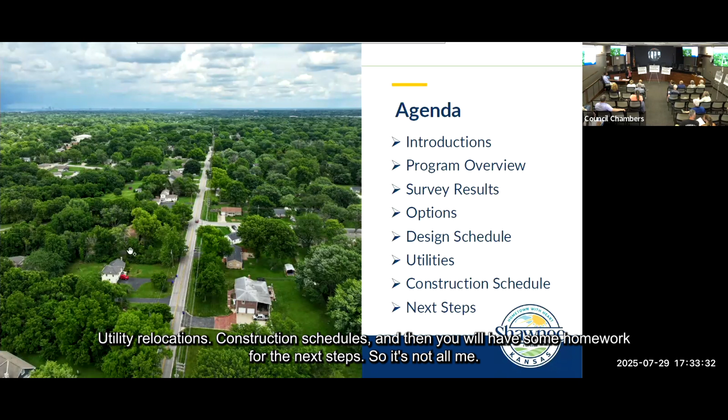But anyways, with me here today is Aaron Castro. We are both managing this project. I work for the City of Shawnee. I've been with the City of Shawnee for about a year, and I've been doing municipal projects for the last 10 years, 8 years, I don't know, I lost count. Aaron has been providing engineering consultant services for municipalities for about 15 years. Together we want to manage this project with you and for you.

Our goal is to lead a very successful community center transformative project along the corridor, along 51st Street from Quivira Road to Black Swan Drive. We want to give you priority because you are the ones that live, work, and drive that road.

So what is the project? Let me introduce it. This project is a street improvement project of a section of 51st Street from Quivira Road to Black Swan Drive. The idea of this project is to do street improvements, storm drainage improvements, and also increase the connectivity of this area that felt a little left behind. What you're seeing in this presentation right now, all those lines in blue, are areas that currently have some sort of sidewalk, trails, or bike lanes, but that section specifically continues to be very narrow, without any sidewalks and with ditches.

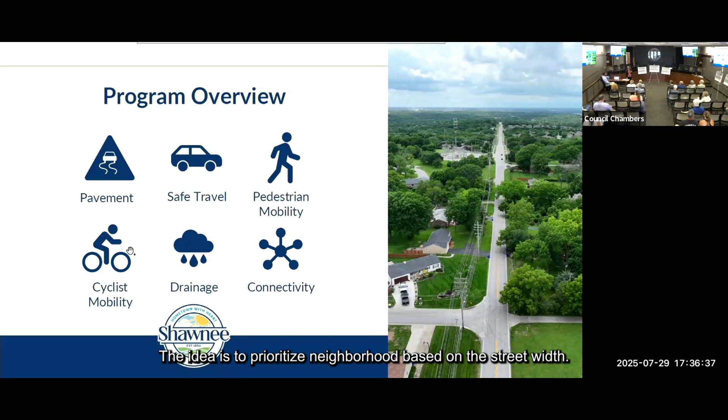The idea is to prioritize neighborhoods based on street width, traffic volume, residential units per lane mile, distance from school, distance from parks, connection to curb streets, and connection to sidewalk streets. As we continue to improve this, we continue to improve more and more of these neighborhoods so we have better connectivity.

All right, citizen input results. Thank you for everybody that completed the survey. For those that didn't, don't worry, you'll have a second opportunity, and you'll leave with some homework out of here today. But what the initial survey told us was a little surprising for me, but surprising in a good way.

It does seem like we do have some drainage issues, but they're not major. Based on the results, 23% of people reported drainage issues completely related to intense storm events, which is expected based on the areas and the ditches. They reported that the majority of the water was ponding along those ditches. Some people reported ponding water on their driveways and backyards. We will try to see what we can accommodate with this project to make sure that everybody's drainage issues are taken into consideration.

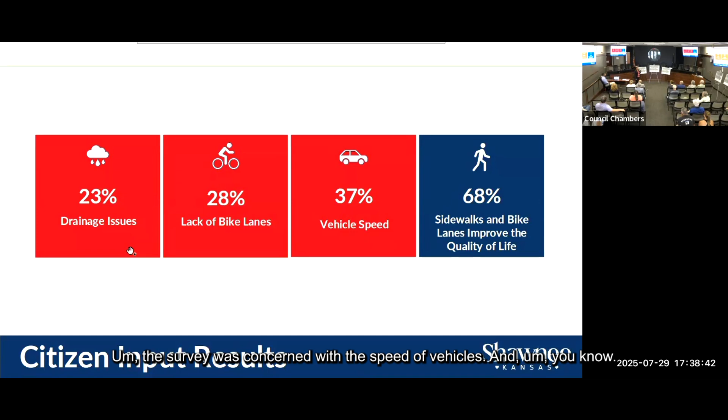Hindsight is 2020. I think that if I would have given you guys options to choose several, that number perhaps would have been higher based on the comments that I read from many of you. But what we concluded with this survey is that regardless of the concerns, 68% of the people that responded would be supportive of installation of sidewalks and/or bike lane, or a combination of both.

Basically, the input of this project, of this survey, told us: hey, we need this, we need these improvements, we need the connectivity. It's not necessarily very safe for kids that are going to school, waiting for the bus. And let's see what you have to tell us.

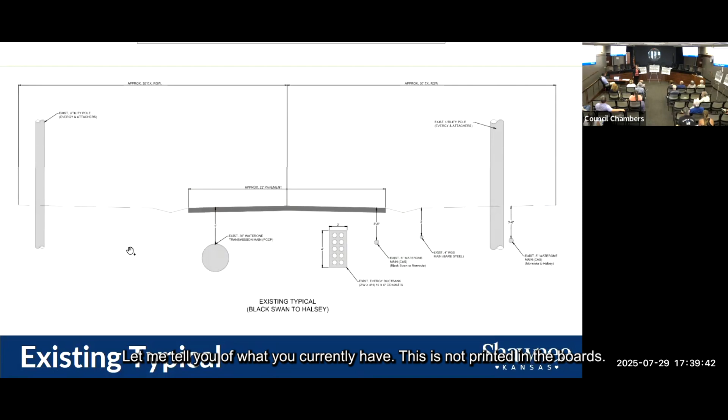So to tell a complete story, let me tell you what you currently have. This is not printed in the boards, but basically today's street section is about 22 feet from back of curb, pavement section. 22 feet, and that's basically it.

There are ditches, a lot of underground utilities. You can see that - let me see if I can work this pointer. Okay, no, I cannot. But that square thing with holes, that's an Evergy duct bank, Evergy's facility for power. Then there's a round pipe underground, that's WaterOne. And then we have some other stuff - more water, more gas, more communications in there. And the side things that you see going up, those are the poles that we can see. They're very evident, so that's what we can see above ground.

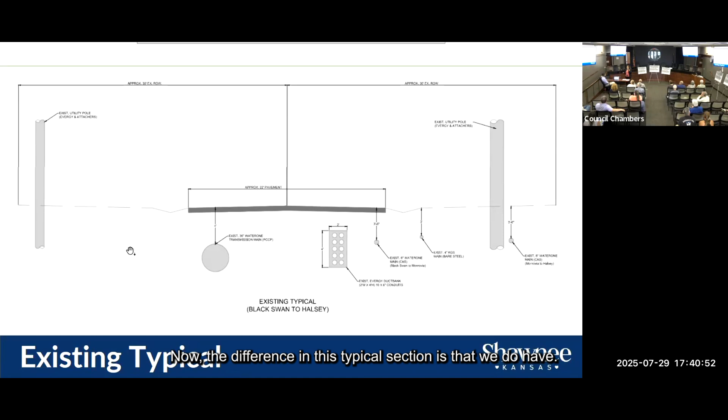This typical section is basically from Black Swan to Halsey. Now, the difference in this typical section is that we do have quite a wide right-of-way in there - it's a 60-foot right-of-way. But the right-of-way becomes a little bit narrower as we drive towards the east, towards Quivira. At that point, it's about 50 feet, so we lose about 10 feet of right-of-way and still have the same utilities, still have all the facilities. So just to tell this story, it's very crowded.

All right, so what are the options and what is the name of the game? Find the difference. We have developed multiple options for you, and I'm sure that even after this meeting, we could develop 100 more. They will all be feasible. Today's meeting, the intent of the meeting, is to show you 3 basic options that have sub-options.

Option 1 keeps the street width, or the pavement width from back of curb to back of curb, at 36 feet. We are saying that this is kind of like a minor residential collector with bike lanes. On this option, let's follow what we have at the west of Black Swan - it's wider streets, you have sidewalk on both sides, and bike lanes are allowed.

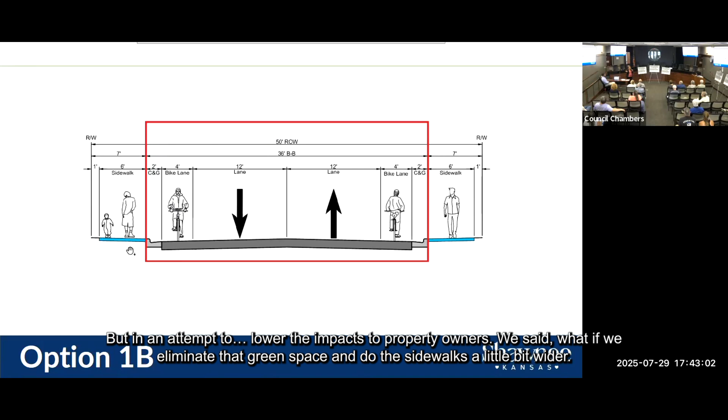Now, option 1B: the width of the street from back of curb remains the same, but in an attempt to lower the impacts to property owners, we said, what if we eliminate that green space and do the sidewalks a little bit wider, but directly back of curb? So this is like when you go to the eye doctor - option 1 or 2.

Again, same back of curb width. And here I kind of put them together for visualization. As you can see, the difference is that green parkway in between the sidewalk for this option. This option keeps the streets also wider. So just keep that in mind.

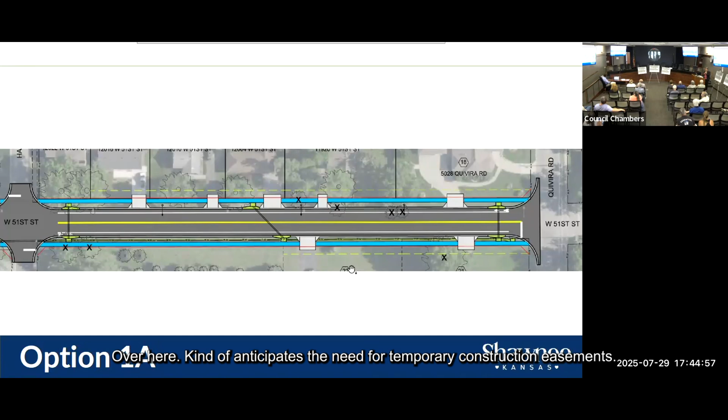So what I'm trying to show you here in this picture is this yellow line over here kind of anticipates the need for temporary construction easements. So it's only an anticipation that we want to show kind of how close would we get into those yards with this option. The red line, which is right here, kind of hugging the blue sidewalk, that would be the additional right of way that we would have to acquire in this particular portion of the project to do those improvements. The blue lines are associated with the sidewalk, and then the space in between, it's that green space.

This gives you a general feel of what the driveways look like in a project like this. You can see they have those kind of, I like to call them wings.

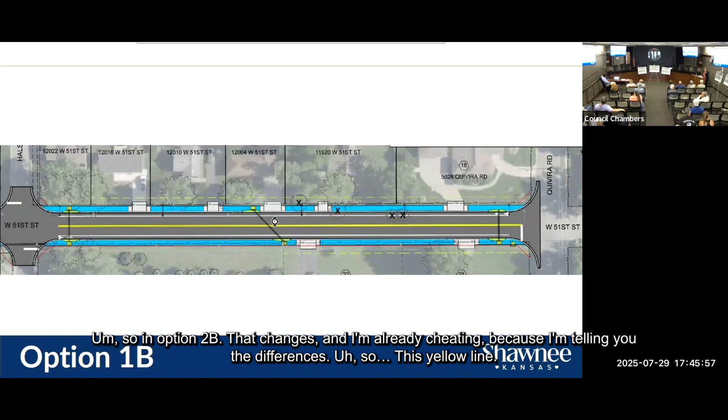So in option 1B, that changes. And I'm already cheating because I'm telling you the differences. This yellow line gets a little bit closer or farther from the property, okay? The sidewalk, it's right at the back of the curb. You can see the different feeling on how the driveways would kind of look like. So that's for that.

Oh, the white lanes over here, those are the bike lanes. So that's how continuing that section of 51st Street would look like for options 1A and 1B.

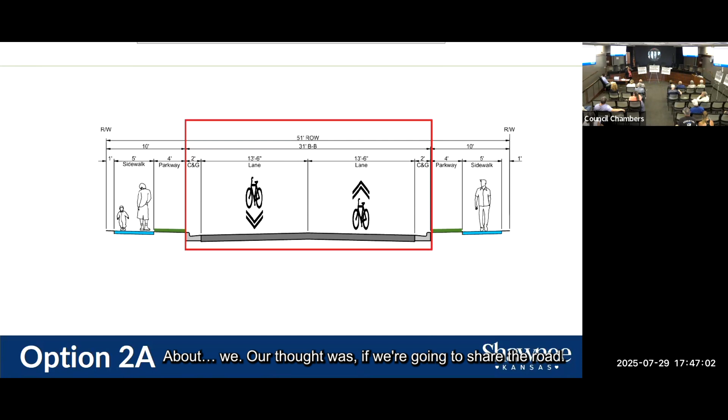Now, with option 2, we went a little bit crazy. We're like, okay, we're making progress with option 1, what else can we tweak? So in here, we changed it a little bit. We went 31 feet back of curb to back of curb, but we had 3 more options. We looked at this, our thought was, if we're going to share the road with bicycles, if we're not going to give them a dedicated lane, can we come with an option that maybe satisfies everybody? So this is kind of what we looked at in option 2.

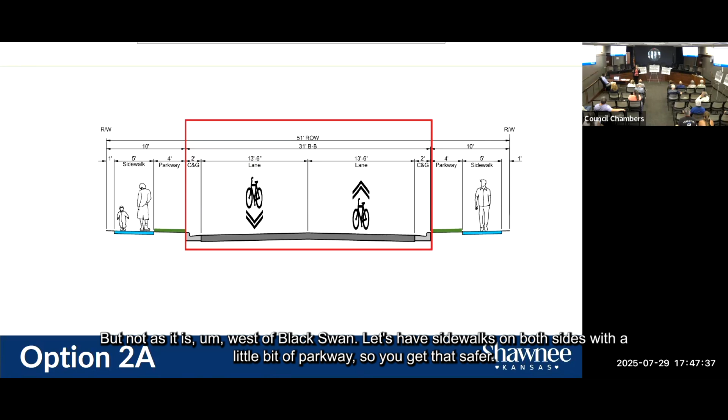So one of option 2, it's let's share the road. Let's make the road a little bit wider than it is today, but not as it is west of Black Swan. Let's have sidewalks on both sides with a little bit of parkway so you get that safer buffer from the cars. Or let's go ahead,

maybe, and on the north side, do a shared use path that can be used for people that walk, for bikers, however we want to use it. Or let's make the parkway smaller with sidewalks on both sides.

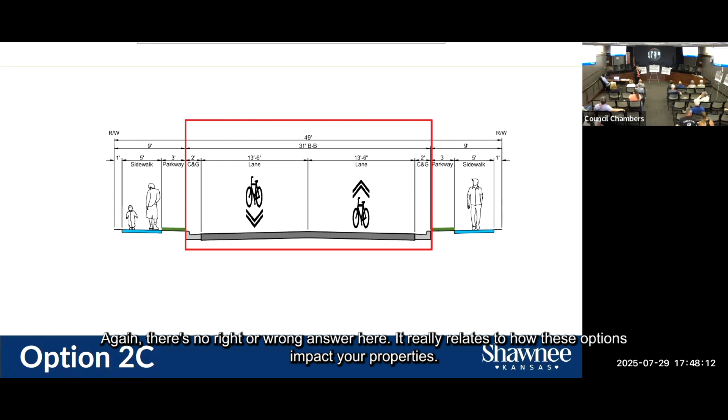Again, there's no right or wrong answer here. It really relates to how these options impact your properties and the feel of your neighborhood. How do you want to see your neighborhood change?

I kind of went through the same over here to show you the differences. And I also drove myself to places like this. I took the Nieman path over there and biked it with my son. I went to Merriam, and I wish I could give you an answer, but I like them all. They're different, they fit those neighborhoods. So I encourage everybody to try to look for something similar and try it out so you can have the same feelings for options like this.

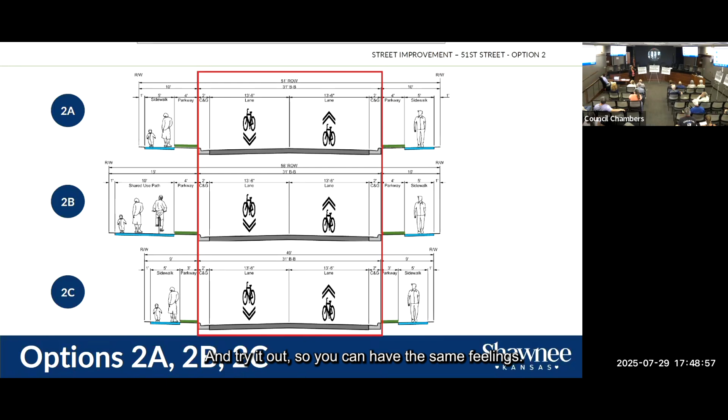So I'm going to come over here. Sorry, I'm going back and forth, but I kind of want to show on this option. So this yellow line right here, it's about the limits of construction or of the temporary easement for option 2A.

You can see we estimated the tree removal as a complete estimate. Please don't take it to heart. Anything that we're talking about in today's meeting are very estimate amounts.

But for example, we anticipated that in option 2B, you can see how much closer it would get, and it would give us the need to remove an additional tree from this property. And then option 2C, it's a little bit narrower. So again, option 2B, 2A, which one do you prefer?

One or two? One or two?

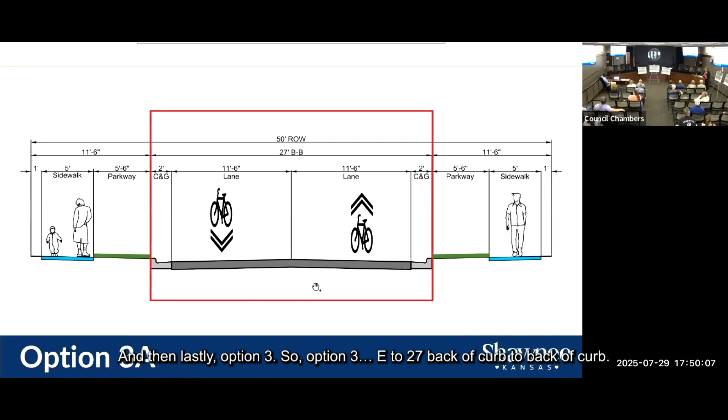And then lastly, option 3. It's 27 feet back of curb to back of curb. It is most similar to what you have today as far as width, but it would still have curbs, still get rid of the ditches, and it will have sidewalks. So the driving feeling will be similar, but the neighborhood feeling would be a little bit different. Again, this is share the road with cyclists, with some parkway over here.

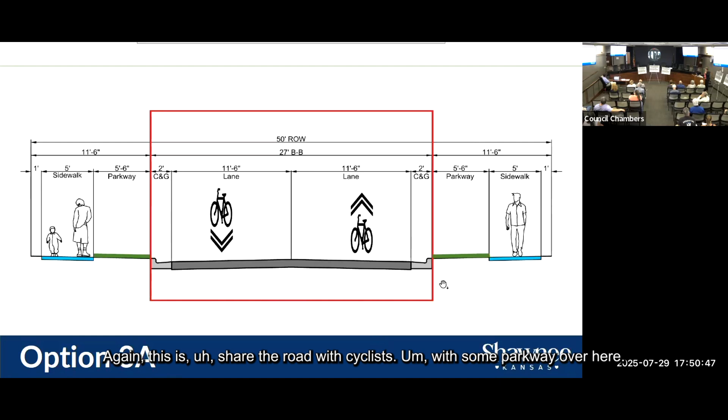And then in option 3B, we get rid of that parkway, so we put the sidewalks to the back of curb. Some benefits that I can see on the parkway, I'm not against or in favor of any of them. In talking to people in both neighborhoods, just based on my own research, some people like the fact that they only had to mow up to here, that they didn't have something in the middle to mow. So I thought that was interesting, and I shared that with you guys.

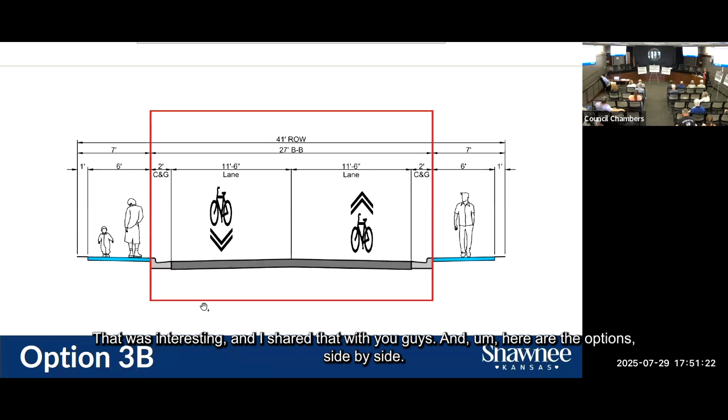And here are the options side by side, options 3A and 3B. And this is how it would look on that corner of Quivira and 51st. So in 3A, we still get into several of the trees, and in this one we do as well, but we're closer.

Now, Ibaidi, why are you so concerned about getting closer? Who cares? Let's have the green space. Several factors.

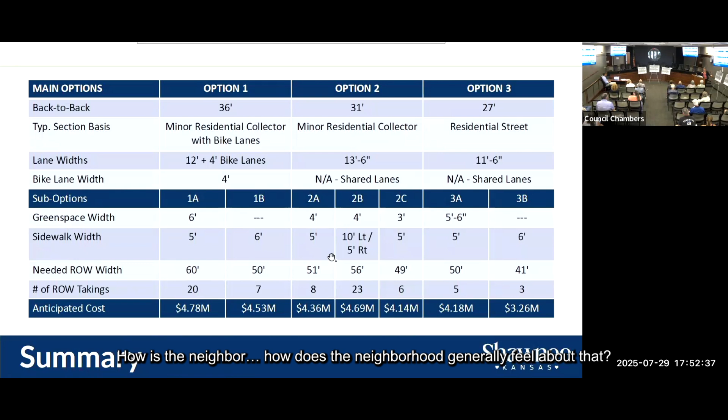One of them being utilities. Utility relocations are going to play a big number on this, so it's going to impact the cost and it's going to impact the timeline for the project. That's reason one. Reason two is how this can impact properties - the wider we are, the more right-of-way takings we need. How does the neighborhood generally feel about that? We want to know that from you, so make sure you tell us.

But in summary, I put this table together - well, Aaron put this table together - where we walk you through the different options we just talked about. So option one basically says we're going to have 36 feet back to back. That's how wide the street is going to be and feel, and we are going to have dedicated bike lanes and sidewalk with this option.

Now, for option one, we have sub-options 1A and 1B, and they basically come down to do we want green space in between the sidewalk and the street or no. You can see the estimated prices for both of the options, above 4.5 million. The price includes design, right-of-way takings, acquisitions, utility relocations, obviously material cost - all of that is taken into consideration, as well as a contingency for this project, just based on the uncertainty of being a concept design.

Option two is the middle spot where we're not going as big, not going as wide, but we're going wider, and with that we have no dedicated bike lanes, but we share the road with cyclists. Within those options, we have three sub-options. One, it's just a sidewalk with a green space. Option B would be let's have a trail or a shared path. And then option C is let's do the sidewalks, but maybe with a reduced green space.

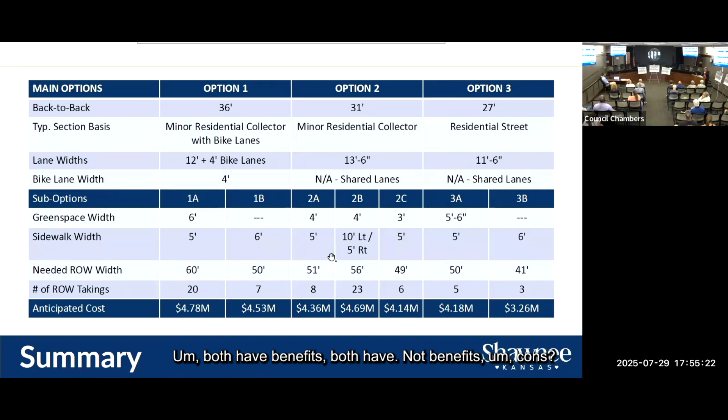And then option three follows the nature of what you have there today, a little bit wider, not that much wider, with sidewalks, with green space or no green space. So the cost definitely goes down as we move down these options. The feeling of the neighborhood goes from having wider streets to more narrow streets. Both have benefits, both have cons, and they are outlined and summarized in these boards.

But I will also make my own summary here. The narrower we get, the less takings we need and the less utility relocations we have to do. The faster the project moves forward, the less expensive it is. The other options are also possible, but they require more takings, they would likely be more time consuming, and more impactful for all of you.

So what is the design schedule, Ibaidi? You've talked a lot, very fast - what do you need from us?

Well, I have put together a second survey. You can ask us questions when you're here. For those at home, I will make sure to leave this presentation on for a while and switch the options every minute or so, so you have some time to digest them, and they will be published tomorrow on our website. But for those here, you can mingle, take a look at the boards, and follow up with the survey.

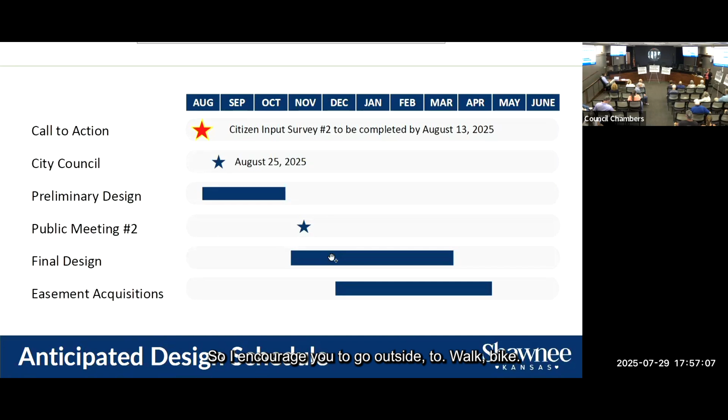So on your way out, you can take a little QR code that will take you to a survey, or you can fill it out by hand, whatever you prefer. You don't have to do it today. You have until August 13th. So I encourage you to go outside, to walk, bike, see how you would feel in these instances, and then let me know what your preferred options are by August 13th. After we gather all that input, we're going to share this information with our city council and get some direction.

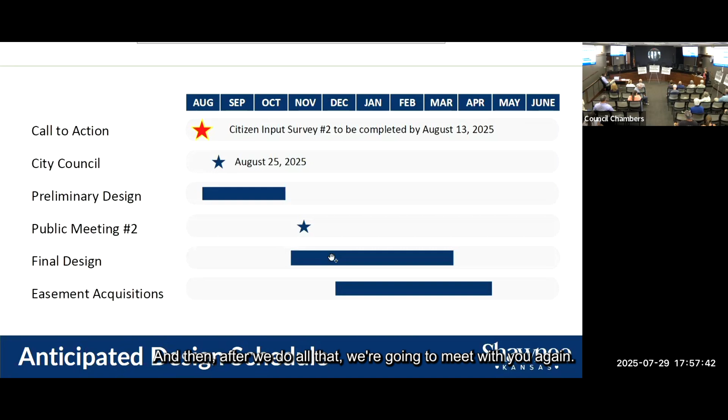From them on how to move the project forward. At that point, we will begin our preliminary design with survey information, so that's going to help move the desired option forward. And then after we do all that, we're going to meet with you again. The whole idea is you can be as involved or as hands-off in this project as you want. I think the more involved we are at the beginning of the project, the better product we give to our residents. Then final design, we anticipate to finish by the end of March, maybe beginning of April. And then in conjunction to that, we will begin the process of easement acquisition. Again, we will walk you through all that—that's your permission to let us be on the property to do the work.

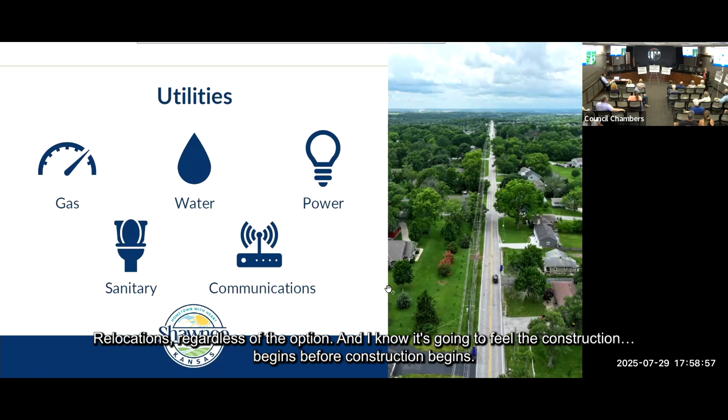Now, I touched on this before, but I want to stress the importance of utilities. Each option is going to have utility challenges, and the project does require a lot of utility relocations, regardless of the option. I know it's going to feel like construction begins before construction begins, and it's a process. We will walk you through that as much as we can. All utilities will have to relocate: gas, water, power, sanitary, AT&T, Spectrum, you name it, all of them, Google.

So then we will meet again. Wow, and then again. So we'll meet a third time and a fourth time. And then maybe we can meet again to celebrate too. I don't know, I think I need to get council approval for that. But...

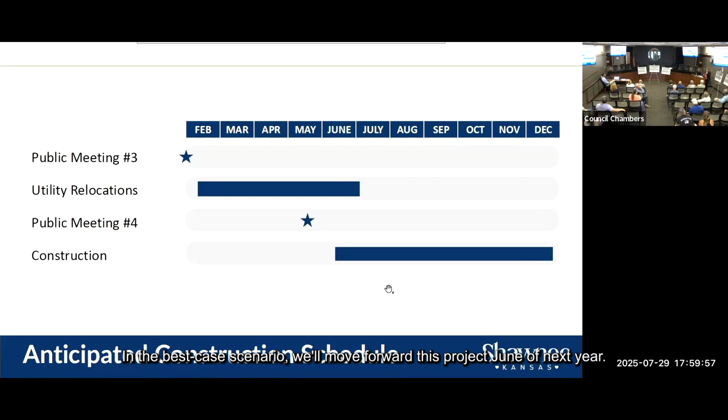There's a period of utility relocations, and I have shown that on this anticipated schedule. And construction—this is again very estimated, it would all depend. In the best case scenario, we'll move forward with this project in June of next year and finish it in December of 2026.

So what are the next steps? Here's a survey, I'm going to click on that. All right, so it's a 3-question survey, and I'll show you what it looks like.

We want your name and address. The reason why we want your address is we want to give priority to the people that actually live on that corridor and would be directly impacted. Everybody's input will be taken into account, but those that actually live in the corridor will be given a higher weight when we present this to the council member. It has a picture of these options, and then you'll get to move your preferred option—the ones at the top are the ones that you prefer, and then you submit. That's all you need to do for that.

And then let me see, I kind of lost my presentation. I'm sorry.

There we go. If you're looking for more information, there are two places that you can go. You can go to our construction website and then just type 51st Street right there, click on it. There's another website over there—you can just copy and paste that link.

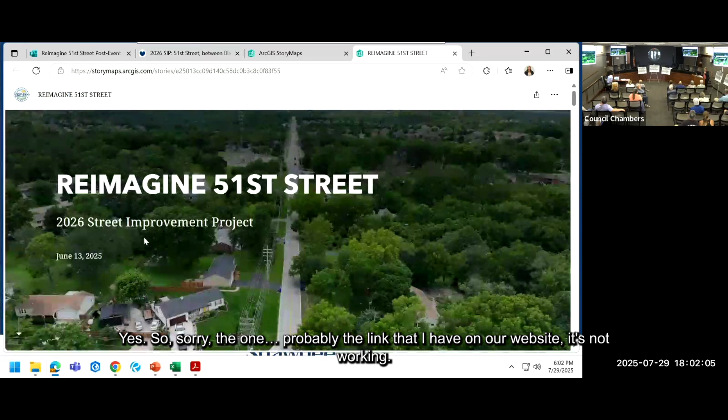In there, you can also find more information about the project. Let me see if I click directly on it, if it takes me—yes. So sorry, the one link that I have on our website, it's not working. But on this page, you have information about the project, schedule, and input. The public meetings are recorded and will be put in there, the YouTube link will be put in there, so if you ever miss one of the 3 remaining public meetings, you will have access to them. The surveys will be here, and all the PDF files of the presentations will be here.

So my information is there everywhere. Call me if you have any questions, if you need help accessing any of this information, please make sure to contact myself or Aaron. We'll be glad to walk you through any of the questions you have. If we don't have the answers, we'll get back to you.

So now it is your time, it's your turn. Can I answer any questions for those that are here first? Yes.

That's a great question. For those at home, the question was which option will put the utilities underground? Unfortunately, none of them. Those are considered private improvements and they're outside of the scope of this project.

Is the drainage for each option different, or would the drainage plan be the same between all the projects? As of now, it's the same throughout. We would need to acquire additional information to fine tune the drainage.

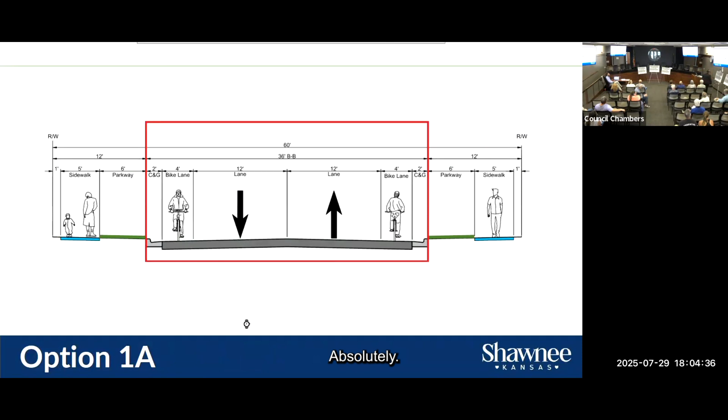The question was if I can put 1A up in the area. So here we are.

This is just a question with no opinion. Have you considered putting where one sidewalk is narrower and the other sidewalk is broader? Would you consider putting the broader sidewalk on the other side of the street? So the question was, would we consider putting the broader trail on the south side versus the north side? We wouldn't be opposed to it, but as of right now, the north side is more favorable, because the utilities of Evergy along the northern portion are less convoluted.

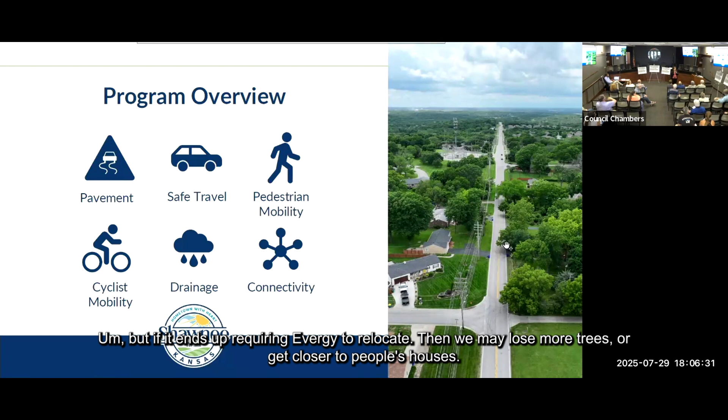Are the power lines going to be moved? Are the power poles going to be moved? Each option differs on the number of poles that would need to be removed. The narrower the street is, and the closer the sidewalk is to that street, the fewer poles we will need to relocate. The wider it is, the more extensive the relocations would be.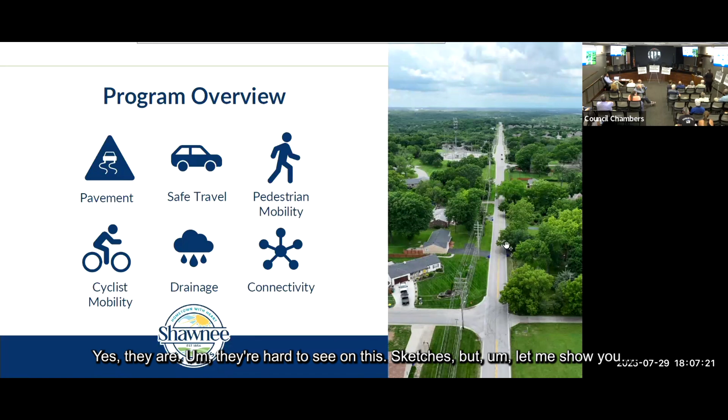Is there any lighting provided in any way? Great question, thank you. The question was, is there any lighting upgrades provided with this? Yes, there are. They're hard to see on these sketches, but let me show you. It would be kind of like this, right here, one is shown. Lighting is part of these upgrades.

Back to the statement about the wider trail being on the south side, the park's on the south side, so that might make more sense. So the comment was regarding the trail being on the south side - it would make more sense since the park is on the south side.

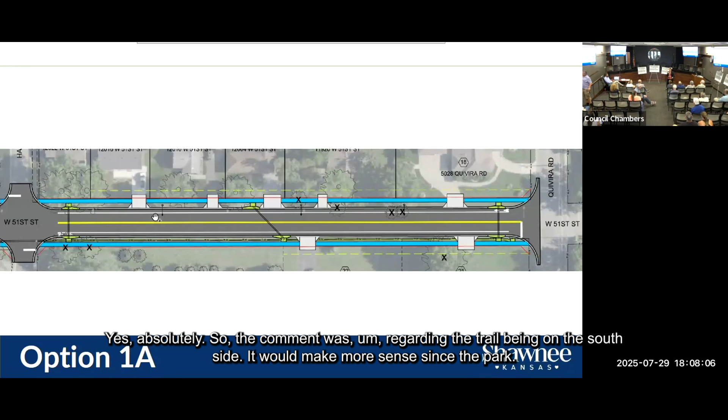There's another, yes. I think I have that. So yes, it appears that we have parks and school. Here we go, so we have the elementary school here and the park here.

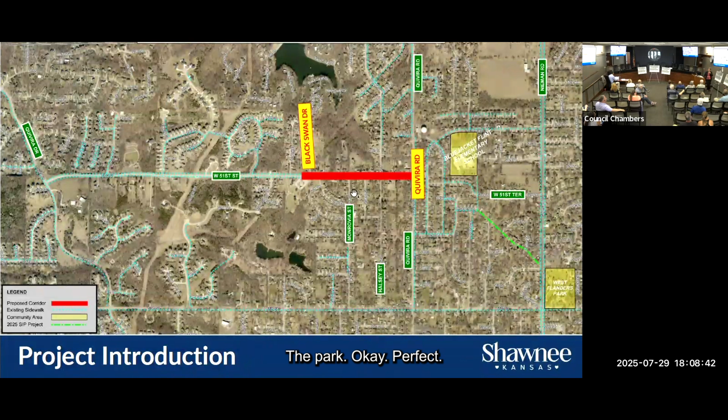Agreed, yes. Question - if we went with, I actually have two questions. If we went with just a wider sidewalk on one side and maybe a bike lane, as an option two as well, instead of having to have sidewalks on both sides, could we just go with a wider bike slash sidewalk on one side and a bike lane on the other?

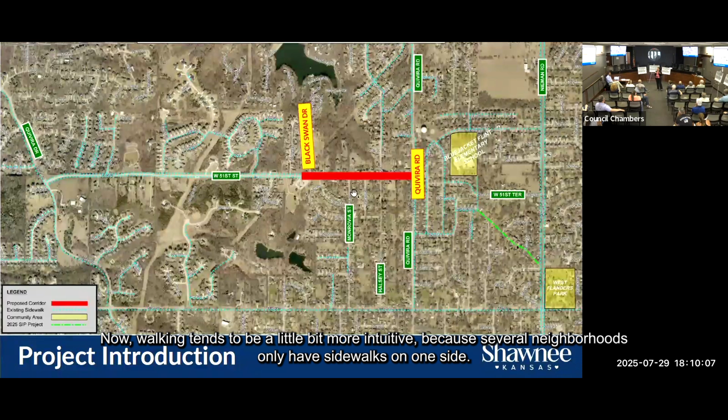So the question was, would we be able to combine some of these options with perhaps the sidewalk being on one side and bike lane on the other, instead of having sidewalk on both sides? I think we looked into it and we could look into it further. The challenge becomes where you have the crossings for the people biking and even those walking. Walking tends to be a little more intuitive since several neighborhoods only have sidewalks on one side. It's with the bike lanes that it becomes more challenging. We even looked into having two-way bike lanes, but it just didn't feel that this neighborhood was the right approach for that.

You would still need to go wider. When we looked at it, it didn't feel that it would fit this neighborhood in particular. Now, would we be willing to look at sidewalks on only one side? I think that could potentially be an option depending on utilities. We're too early to see that, but we will keep you informed. Did that answer your first question?

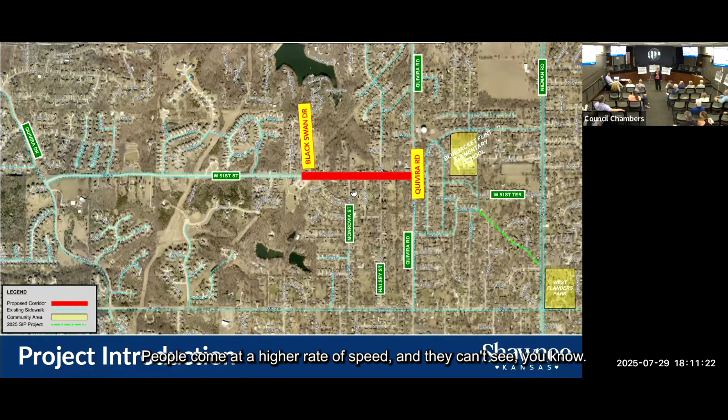You had two questions. Okay, what's the second? My second question is, I live off of Monrovia and 51st, and just to the west of me is the big dip before it goes back up near Black Swan. In that area, people come at a high rate of speed and they can't see you pull out. So is there going to be an elevation change with the drainage going in there to help reduce that?

You're talking about right there at the west end, at the tie-in? Yeah, just a little bit west. Whether or not to shave off the hill and provide improved sight distance. Right. And I will give you this because they can't hear us: the question is, will we do vertical changes to improve visibility at certain intersections? I can't give a definitive answer on this because we'll have to go back and discuss a potential option there with the city.

But right there is Evergy's facility, right on the corner, at the top of the hill. So currently the project and the profile are tying in right there at Black Swan, which is basically at the crest of the hill. Then as you go down, we'll be using a 30-mile-an-hour design speed for everything from Black Swan to Quivira Road, which will to some degree smooth out at least the sag that comes just to the east of Black Swan. And then when you come back up over the hill and back down...

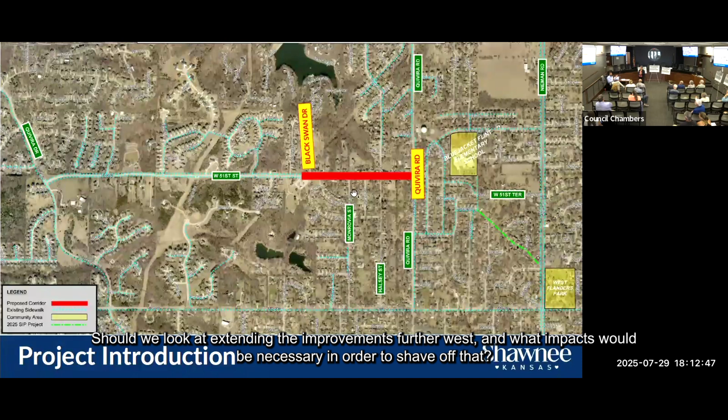There's an open question here: should we look at extending the improvements further west, and what impacts would be necessary to shave off that large hill right there? I'll just state a fact: it will have large impacts to Evergy and their facilities, and if they're private facilities, it will come at a cost to the city to make the improvements. At least currently, the project budget doesn't account for those types of improvements.

I live at the northwest corner of 51st and Monrovia, and I refer to what Doug just said. Cars coming from the east, headed west, when they go by Halsey, it goes down. It's not slight, but if you've got a driveway west of Monrovia, you don't see the cars until they come over the top from the east. One of the primary thoughts is we've had one fatality and six accidents since I've lived there in front of my driveway.

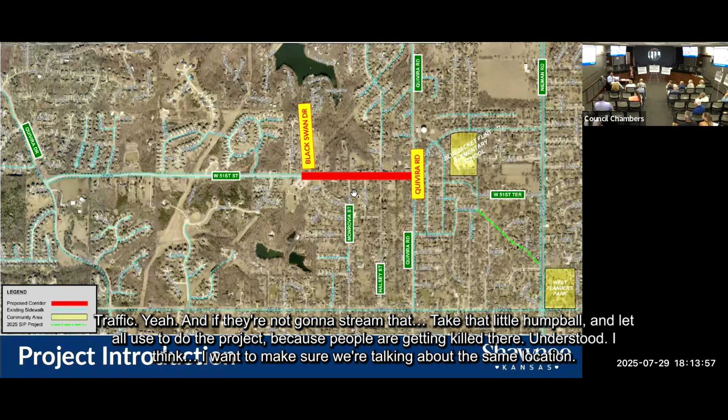They've all been caused by obscured traffic. And if they're not going to straighten that, take that little hump off, then there's no use to do the project, because people are getting killed there. Understood. I want to make sure we're talking about the same location. You're talking about the crest that is to the east of Monrovia?

Okay, that is part of the project. You come from the east, you go down in a little dip, and you can see the top of it, but most cars you don't see until they start up, within 100 feet of that. At 35 miles an hour, everybody who comes to my house is told they've got to drive straight out, they can't back up, because it's too dangerous. So like I said, there's the one fatality plus six additional accidents. A couple of them should have been fatalities, because of that road and that dip.

Well, I hope I can put your mind at ease real quick, because that crest you're discussing is part of the project, and part of the project will evaluate sight distance onto that section. The crest I was discussing previously is further to the west of you, over near the Evergy facility.

Sure, and we can't go back in time to figure out all the decisions made at that point. But to answer the specific question about which side of Black Swan - it's the east side. That one is part of the project, and we'll be looking at site control, sight distance issues, and stopping distance as part of the project.

Have any of the engineering contracts been awarded yet? Yes, the answer is yes. BG Consultants is helping us design this project. We are in the design phase only, concept design - so very, very early.

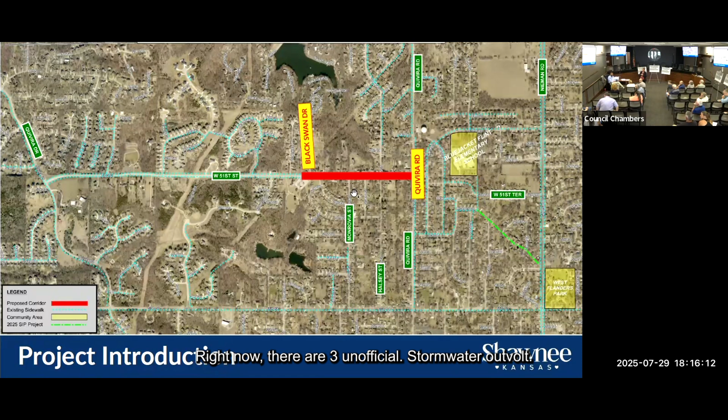Right now there are 3 unofficial stormwater outfalls, no curb. So the question was, currently there are 3 outfalls - when we do the stormwater improvements, have we looked at how many outfalls there will be on the north side?

As you mentioned, we're still pretty early in the project. The intent with projects like these, to the best of our ability, is to match and not alter existing drainage patterns - keep water going where it goes today, to the same outfalls. What will change is instead of surface drainage with open ditches, like you'd see on most improved roads around town, we'll install curb and gutter with storm sewer structures and pipes underground, enclosing the stormwater instead of having it at the surface. But the intent is to match existing conditions and take water to the same outfall it went to before.

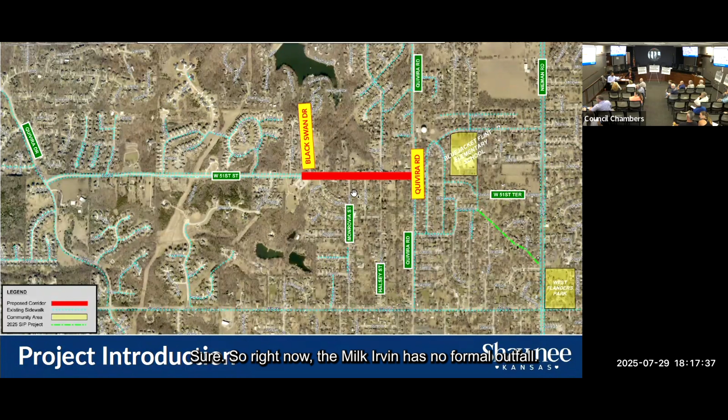Can I continue along that vein? Sure. So right now, with no curb and no formal outfall, the outfalls that are there now have been there for 50 or 60 years - basically corrugated pipes in ravines that existed prior to construction of Weir Road, before it was renamed 51st. When you add curbs, the water redistribution, instead of seeping into the ground as it falls off the road, becomes super concentrated. That's where I'm heading with this.

Last question - there are, I believe, 15 septic tanks in that watershed on the north side of the road, beginning at Black Swan, not the first 2 or 3. They are on city sewer. As you head east, houses have septic tanks, and around the corner at Halsey and Monrovia there are other houses with septic tanks. Has anybody given thought to what happens to those septic tanks? Will they stay in the watershed, or is it possible they would connect to city sewer? Because as you add the outfall, you'll find it falls right in line with pre-existing septic tanks. I believe that will be a problem.

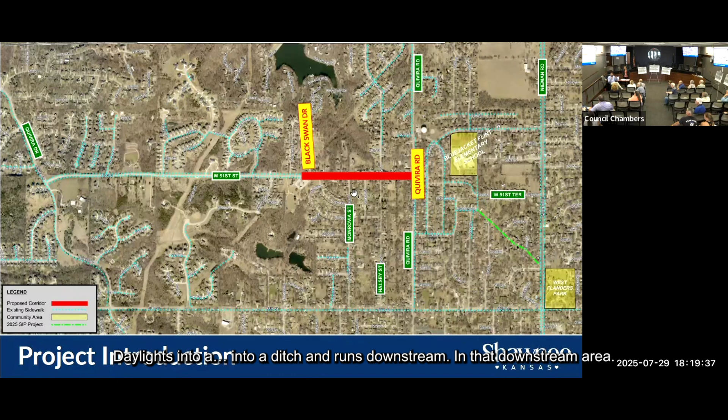I just want to make sure I'm summarizing your concern correctly. I believe your concern is that at the outfall locations, where water from this project daylights into a ditch and runs downstream, there are septic tanks and systems in that downstream area. Your concern is that the impacts from the project - a slight increase in runoff due to increased impervious area - could affect those downstream septic tanks.

Are you experiencing issues? We can talk about it in private if you want - I'd like to hear more. Do any of the outfalls go south, or will they all go north? Well, there's an outfall to the east from the crest, I believe at Halsey - the majority of that water goes east to Quivira. Then in the current sag before you come back up the hill to Evergy, all that water will still go north where it does today.

I would like to talk to you about what you're seeing and those impacts that there might be. Can you please clarify what an outfall is for those of us who don't know, like what it looks like? I think I know what you're talking about, but it'd be nice to know if I'm driving by or walking by or biking by, oh, that's what they're talking about.

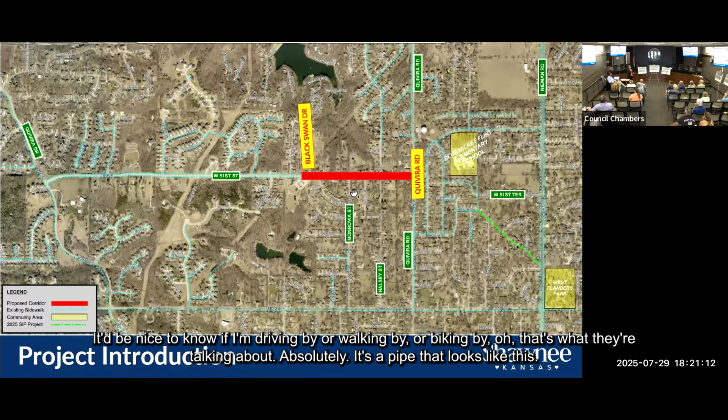So in another case, on the east end of the project at Quivira, there's already stormwater pipes that are underground, and this project will be tying our new storm sewer into that storm sewer. So sometimes we'll call that an outfall from the project, even though it's not visible to you when you're driving around.

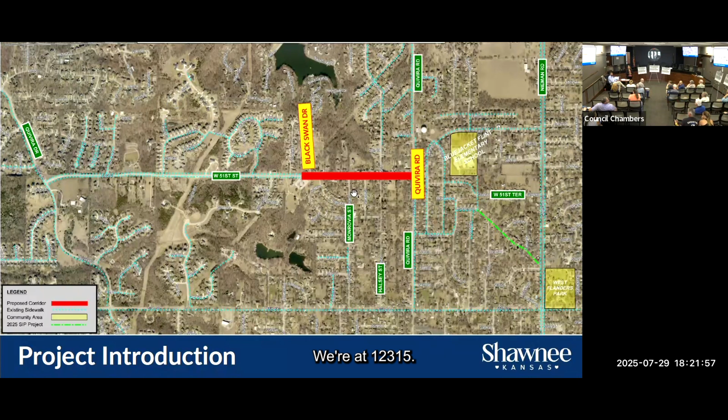We're at 12315, just up the south side, and since he was talking about septic, I brought that up in my initial email response. We got septic, and the storm that we had just a couple weeks ago couldn't flush it out. On the backside of us, we have about 5 homes that, ending from the center line of their house, we get all their runoff from their properties as well, and that whole area floods. That's where my septic is.

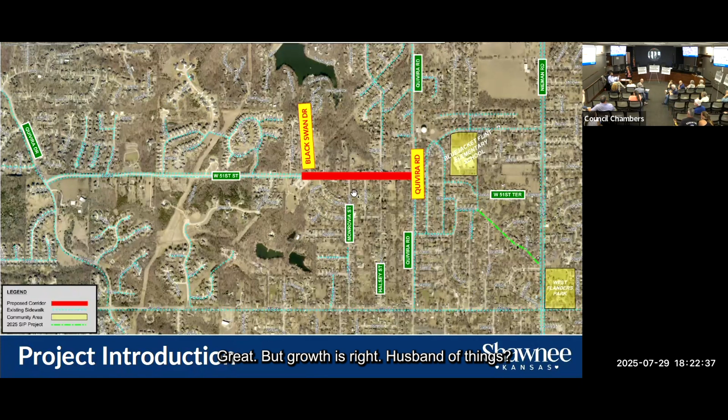So in general, when we're working on projects like this, can you maybe show one of the typical sections? I just want to show you when we come through and there's a new project, it's the city's responsibility to capture all of their stormwater that falls within the proposed improvements.

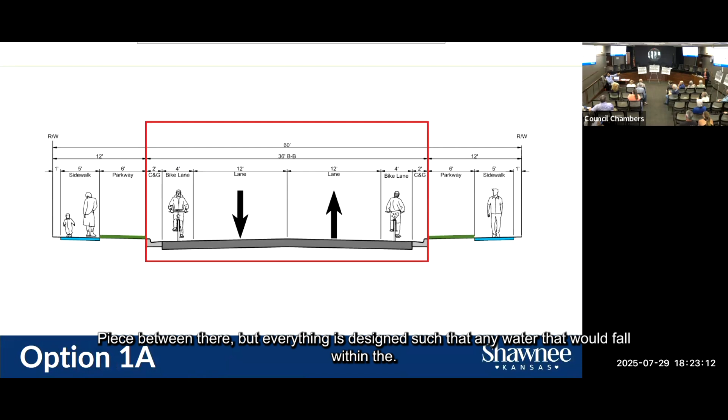So everything, and it might not look that way because of the little green piece between there, but everything is designed such that any water that would fall within the left and right extents of this project would fall and drain towards the curb and gutter, and then go in curb and gutter until it gets to an inlet, and then inlet into a pipe, and then out.

So where the concerns start to become a problem, or not a problem, but where it becomes our job to kind of design around is what happens from the edge of the property then onto other people's yards. Are we trapping water? Are we causing an issue where water that used to drain to a ditch now can't get to that ditch? That's part of every design process for a project like this, is to look at all those conditions and make sure that we're not in a condition where water used to escape a property and then now can't escape that property and is just stuck on yours.

So part of what controls that is then we may have to have the street go a little lower than where we ideally wanted it, in order to make sure that water gets onto the city right of way and then out. Sometimes we have to add drainage structures out there to pick up that water so that we can get it out if we can't take the road low enough.

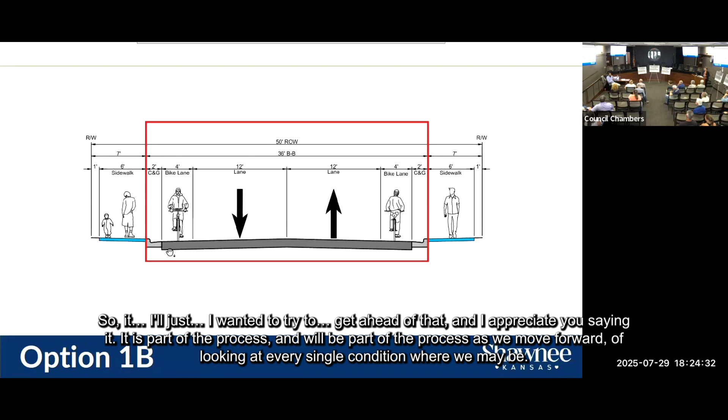So I wanted to try to get ahead of that, and I appreciate you saying it. It is part of the process, and will be part of the process as we move forward, of looking at every single condition where we may be trapping water and making sure we have a way for that water to get out.

So you might have to go lower.

Right, and I'll just note, I know there's a couple of folks that have driveways out there that are pretty close to the existing road. Another part of this job is making sure we're not putting the road in a way and then giving you a new driveway that used to flow from your house out toward the street, and then we just change it and push all the water into your driveway. So we check all that stuff. That's part of the process.

I think what he's talking about is West 51st. The road comes down from the east and the west, and there's a draw that goes through there, and the water goes down to Black Swan Lake.

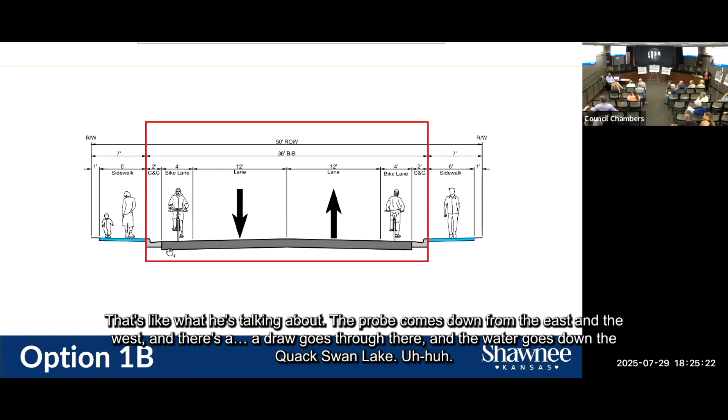So are you gonna put a culvert there? Are you gonna put a bridge? It won't be a bridge. More than likely, it'll be a new outfall, where a portion of the storm sewer will daylight out into the existing ditch and then out onto Black Swan.

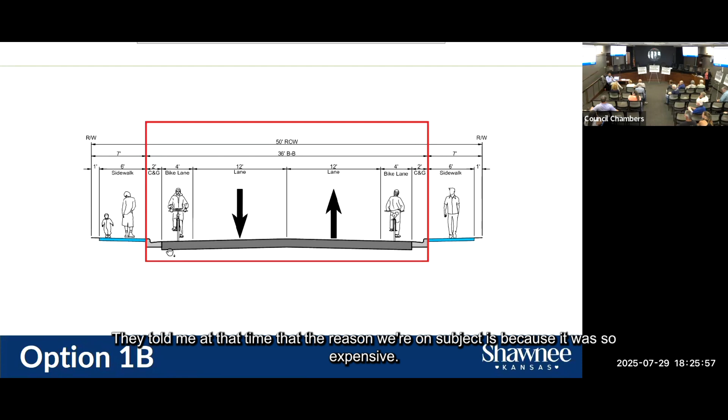I'm talking about the septic tanks. I explored that a number of years ago with the sewer district, and they told me at that time that the reason we're on septic is because moving to wastewater was so expensive it was beyond being appropriate. The benefits would not justify the added expense. He was talking back then, most houses were gonna be anywhere from $20,000 to $50,000 for a hook up to the sanitary sewer.

Is your question, would that change with this project? I don't think it would. Most of the sewer septics I know of on the north side of the road drain north. Correct. That's why I was asking, trying to see if there's a question about whether or not that's outside the scope of this project, on whether folks currently on septic would somehow get switched to the city system, with a pumping station to lift the wastewater up high enough to put it into the wastewater system.

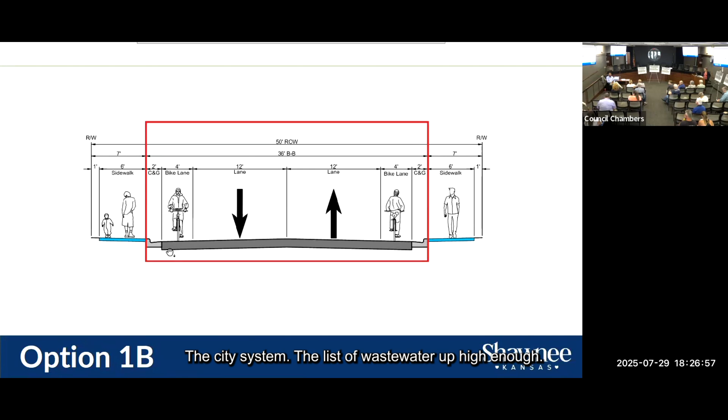Something should have been addressed probably when they put it in, but my house has been there since 1948, and I've been there since 1975. I don't know of anybody in the neighborhood that's had a particular septic problem.

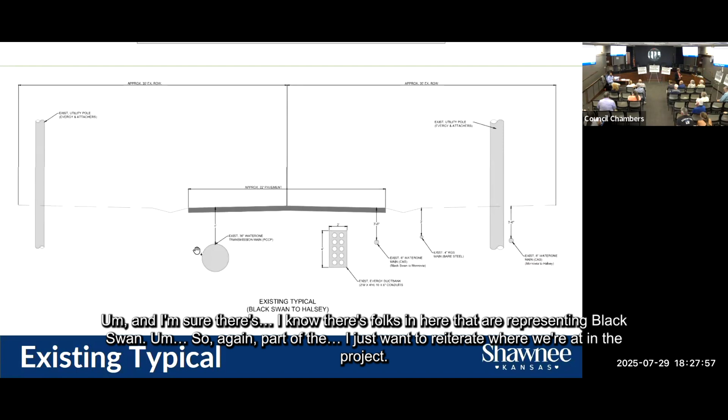Do you want me to take a stab at answering that? I know there's folks here representing Black Swan, so I just want to reiterate where we're at in the project. Currently at concept level survey, there's actually a survey crew starting to get mobilized and out on site, picking up locations. At Black Swan, there are entrance signs at the neighborhood. If the project were to impact those, assuming those signs are on private property, it would be the responsibility of the project to cure that in some way, to make it right with the owners of that sign, put the sign back, reconstruct it, or give some money to help cure that.

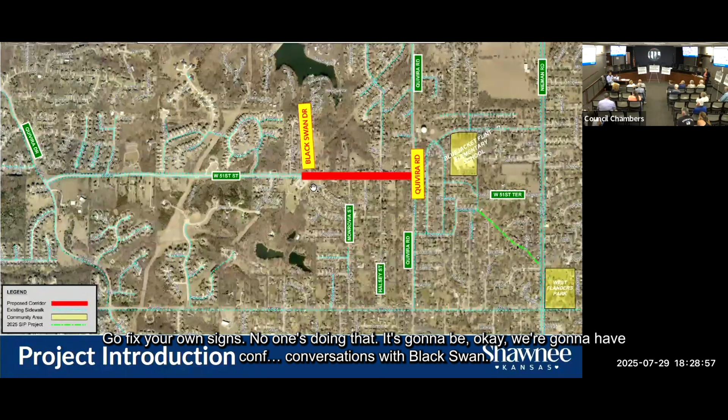Right now, we do not know the impacts to those signs. We're not far enough yet. We don't know vertical elevations or exact horizontal locations of all those things. So to answer the question about whether those signs will be impacted, that's yet to be determined. But I'll caveat that with, if they were, the project would not be us impacting those signs and saying sorry, go fix your own signs. No one's doing that. It's going to be, okay, we're going to have conversations with Black Swan, discuss whether or not these impacts would affect them, and then figure out alternatives to either avoid it or put something back.

Regarding a sidewalk into Black Swan, I don't know that we mentioned or showed that anywhere. One of the renderings shows a dotted red line coming to the property. Oh, that is pretty aggressive. So the dotted red line was intended to show the potential location of where the road and impacts could be. And it sometimes starts that way.

I'll just tell you, whichever option we choose, things are going to change. I want to make sure that when you look at these signs a little bit later, if you see a yellow line, red line, or a sidewalk location, and you leave here and don't ever talk or come to another public meeting, when the project gets under construction in a couple of years, it will likely be a little bit different. I'll just say it will be different because we don't have enough information today to know exactly where things are going to be.

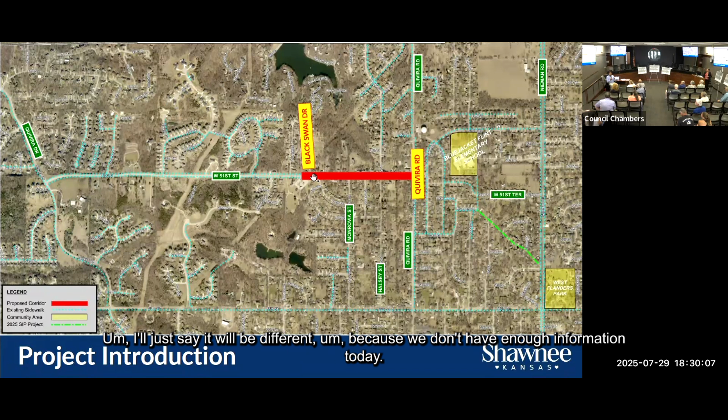We have to go through all the processes I've alluded to, checking people's drives, getting all our survey information, and doing all our analysis and calculations to actually make those decisions. So this is our best attempt, with the information we have now, to communicate where we think and where we're pretty sure there's going to be impacts and changes. And we want to get headed down that way.

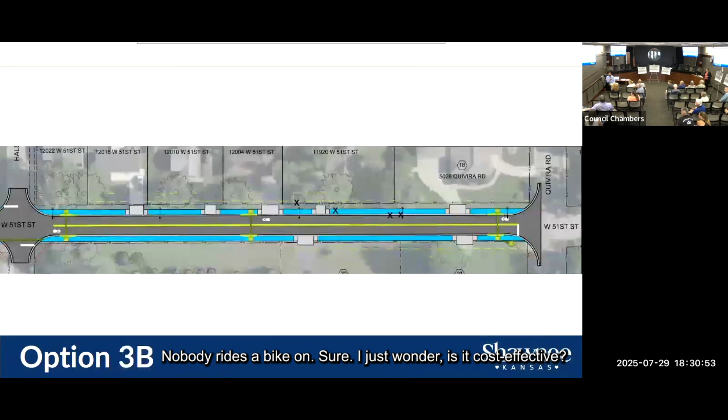So real quick, what is the cost of bike lanes to the project and the wide sidewalk? I say this because I've lived in my neighborhood for 50 years, and I watched those beautiful sidewalks put down on 55th Street that nobody walks on. I watched the bicycle lanes down on 55th that nobody rides a bike on. I just wonder, is it cost effective? Now, I'm all for widening, I've been wanting that road widened since I moved there. But do we need a 4-foot lane, or will a 3-foot lane be enough for a bicycle?

Can I answer your question? Your initial question was, what are the costs of the bike lanes or the widened sidewalks? We don't have it down to an exact figure, it's not necessarily that a bike lane costs this much, but you can get a feel for the cost difference by looking at the table. Option 1 has the bike lanes and 5-foot walks, and if you get down to the far right, option 3, there's no bike lanes, reduced pavement width, and obviously it's going to be less money.

We got another question over here real quick. I think Byron wants to take it.

I would also like to add that when we do improvements, we try to do a comprehensive improvement. So the street improvements themselves are needed for widening the street, and this is the opportunity to enhance other aspects of the neighborhood. When you compare the cost of the sidewalk to the general project, I don't know off the top of my head, I really don't, but they're minimal in comparison to the extent of the project.

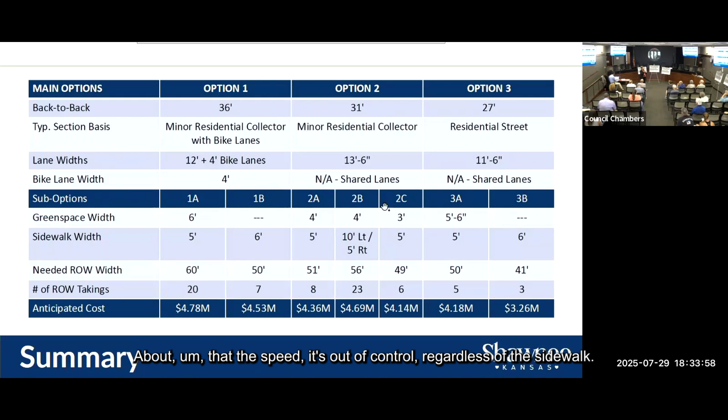This wasn't a question, this is for the people online - it was a comment that the speed is out of control regardless of the sidewalk. It could feel unsafe even if there are sidewalks. So we're talking about a quality of life issue with the sidewalk, and I'm wondering if there will be studies on how safe people feel when there is parking, or when the sidewalk is right up against the street. I believe it will be that people are much more comfortable walking when there's a park buffer. So the comment was, how do people feel generally safer - is it with a green space or without a green space? Definitely the buffer makes people feel safer, that's what many cities have as a standard green space parkway.

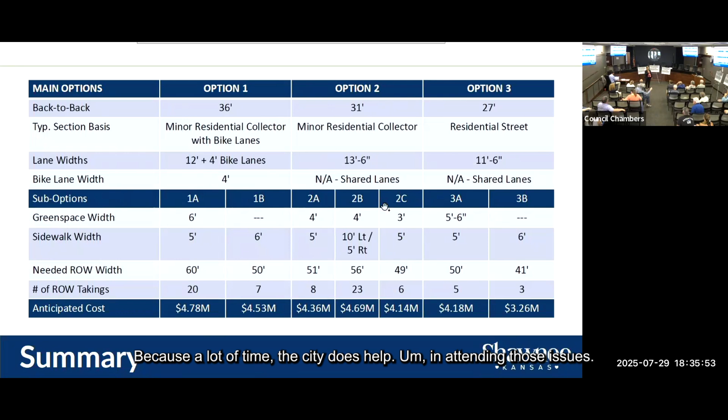Like I said, we're over 300 foot. That's a football field. The comment was the amount of snow accumulated on those areas.

Does the city remove snow from shared use paths? I think the answer is no.

Jason, do we do shared use trail, Parks and Rec over here? I will revise my answer then. Our Parks and Rec does remove snow from shared paths. Thank you.

A shared path is a trail. Thank you for the question. It's an asphalt, concrete trail, so a wider sidewalk, typically 10 feet.

Champagne on this project, or a champagne budget for what the city can afford on a beer budget. You're talking $1.5 million between 1A and 3B, or 3. That's a lot of money. And we're paying it.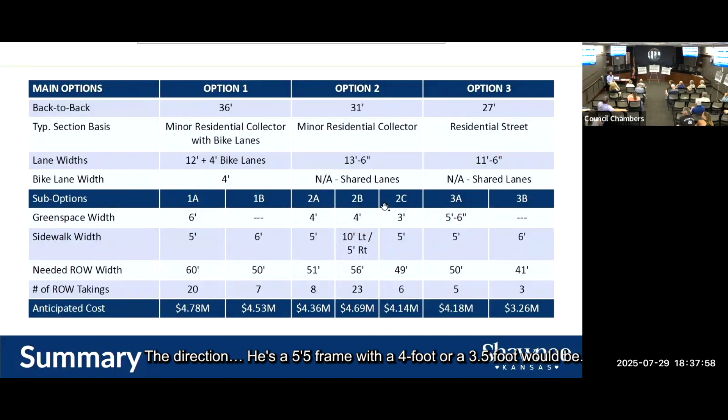The comment was that the options were costly and that taxpayers pay for it. Do we need a 5-foot sidewalk when a 3-foot sidewalk is sufficient? Do we need a 5-foot bike lane when a 4-foot or a 3.5-foot would be adequate? Do we need a 13-foot lane?

13.5-foot lane? Everybody's used to driving on it. I grew up with an 8-foot lane being considered a lot. From observations on my street, traffic slows down where it's narrower. You go out where they widen the road, and it's nice and wide - you can almost drive 4 cars abreast on that 2-lane road. But it's not a road that's being used that way. All it does is make people see that clear open road and push down on the gas.

So the comment is that the wider the street, the faster vehicles tend to travel. Is it necessary to spend this money?

For that comment, even though it's not a question, I will invite you to complete the survey and pick your most preferable options. That's what we're looking for. If the neighborhood prefers a narrower street, we will present that to the council. This is a beautiful opportunity that the city of Shawnee is giving residents to go ahead and voice their preference for these options.

What options are there for a street like this to help reduce speed, besides just a sign? I'm not in favor of bumps and curbs, the speed bumps and stuff, but surely there are other options that can be considered or used maybe in this project?

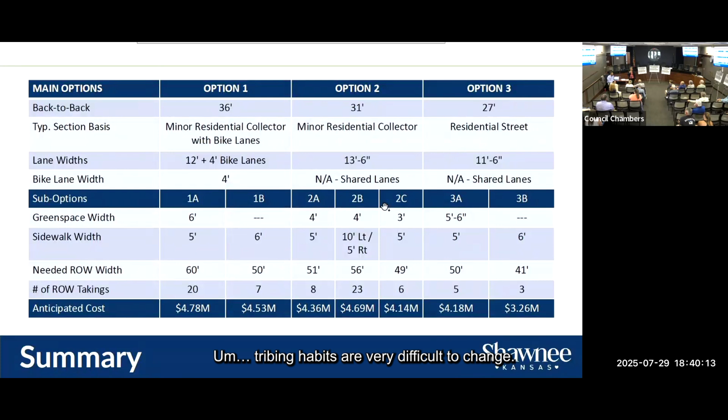It's a great question - what options do we have to reduce or help cars be aware of how much they're speeding? I think for a project like this, it's going to be very challenging. Driving habits are very difficult to change. When we're having these neighborhood meetings, it's a great opportunity to introspect, because the majority of time it's us that are driving those streets.

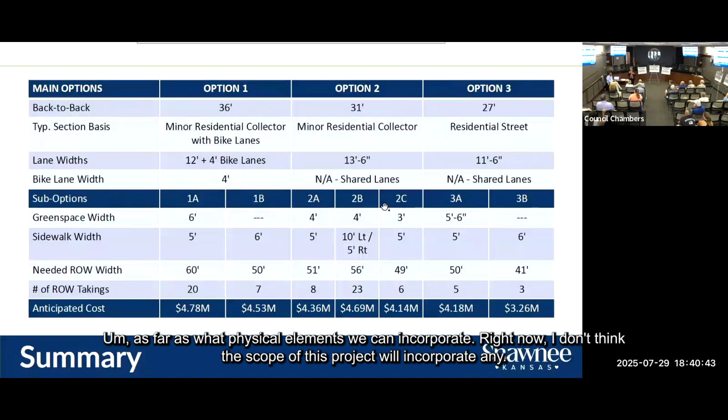As far as what physical elements we can incorporate, right now I don't think the scope of this project will incorporate any, but I'll let you add if you have other insight. Sure, we can't solve that problem as easily as one might hope. There are things that do tend to help - I'm sure you've heard of traffic calming efforts. There are nationwide efforts to reduce pedestrian fatalities and traffic vehicle incidents through traffic calming.

Some of the ways you do that - it gets a little odd in an area like this - narrowing the roadway sometimes can have that impact. As the gentleman mentioned earlier, when pavement is very wide, it's easier to drive quicker. Narrowing the roadway can have an impact on driver speeds.

Whether or how far you can see ahead of you over curves affects driver speed, but often things work against one another. When you can't see very far ahead, driver speeds tend to slow down, but that same case is a problem for people trying to enter and exit the roadway, because now they can't see vehicles coming. So I wish I had a better answer for you - I wish I could solve this problem, because I'd solve it for everybody and probably make a lot of money.

My question leads to this: she mentioned earlier, and I mentioned about the one sidewalk, if we had a wider bike sidewalk lane, and she was concerned about crosswalks. So I'm wondering, if we have a bunch of painted crosswalks along that area and along major corridors like Monrovia, Halsey, and so on, would that entice drivers to slow down because they're anticipating somebody coming across?

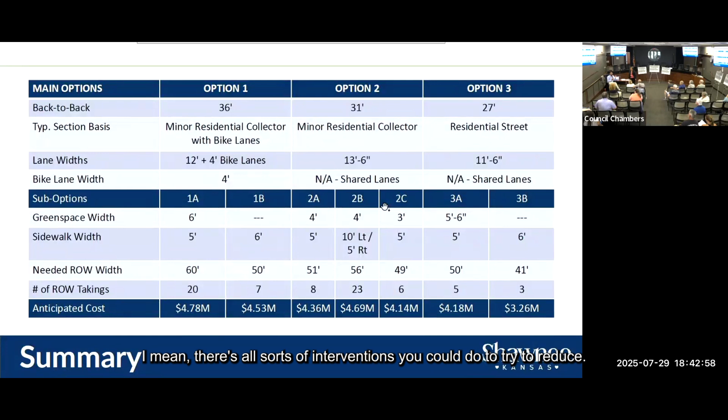I'll speak generally, not for this specific project, but if we were looking at a location where pedestrians need to cross a road, there's all sorts of interventions you could do to try to reduce and bring awareness to that crossing: adding median islands, overhead flashing signs, flashing signs on the side. There are a lot of interventions you can do to try to reduce traffic speeds.

One thing mentioned earlier is that west of the project, there's a bike lane on the north and south sides. If you're on the south, you're riding your bike east; if you're on the north, you're riding west. If you try to reduce that down for this short section of road and put bikes on one side, you're introducing an area where bikes need to cross. Same with taking two sidewalks down to one, in an area where vehicles are already traveling at a high rate.

I'm not saying anything definitive here, just that these are many of the challenges we look at as part of the design process. The reason we're asking for public input is these are the concerns we want to know — what folks in this area care about. In other areas, we could be talking about a similar project and people want a faster road, because their properties don't front the road and most of the traveling public wants to move through quickly. So hearing this feedback is important — knowing the concerns, the sight distance issues, the speed issues, potential drainage issues. This is all helpful information for us.

So first of all, thank you. But we do have some other questions — I think he's had a hand up for a few minutes.

First, I want to say you're both doing a great job, and I appreciate the opportunity to do this — I'm not buttering you up, it's honestly really great. Are you looking at data from Strava or Garmin that shows bikers and walkers and how much they're actually using that area? That gentleman said he never sees anybody, but I see the heat maps, and there's a lot of people using the full length of 51st, not just the bike lanes, and a lot of runners too. So is there other data being used to capture things that aren't just cars?

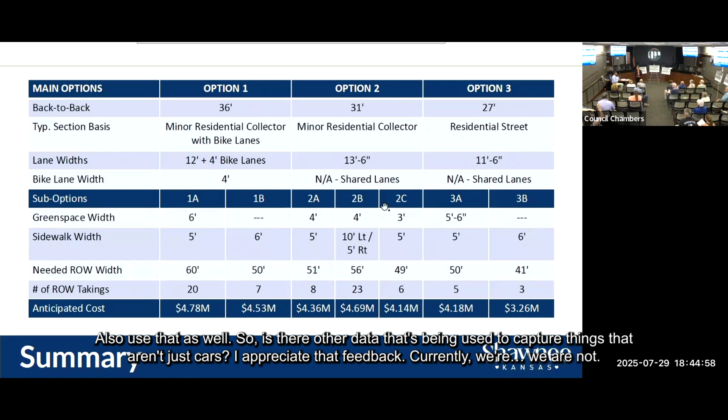I appreciate that feedback. Currently we're not scoped to provide an analysis of pedestrian and bike usage. We do know this section of 51st is identified as a bike route as part of the City of Shawnee comprehensive plan, established before this project came about. So it's part of the project to accommodate bikes — the question then is how do you accommodate them, and what do folks in the neighborhood want to see?

I'll just offer this: this section of 51st is part of a larger portion that was done years ago. Anything we do here — some people like the idea of just keeping what we had to the west and taking it all the way through, but probably everybody living along there is like, let's pause and talk about this. So obviously there are differing opinions, and we have a responsibility as designers to weigh those opinions and come up with what is the best solution for the community.

So I appreciate that feedback. Barry, I don't know, we're kind of pushing time — I don't know if you wanted to let people mill around or keep going on questions. I'm sticking around, I've got others with me sticking around too. Do we have any more online questions?

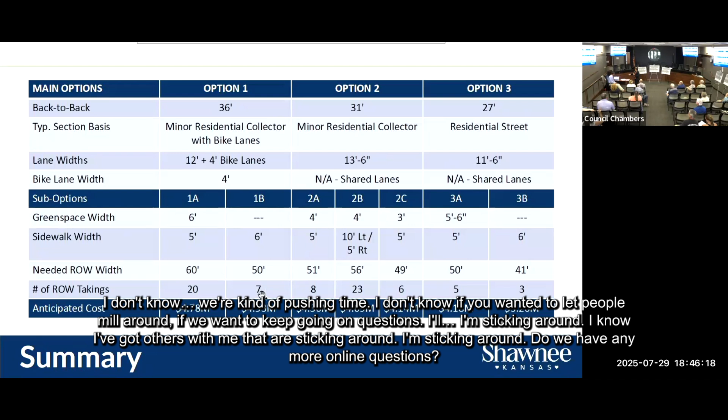Would you be putting partial sidewalks down in the neighborhood entrances in between Quivira and Black Swan, or would this only be for 51st Street? That's the question — there's only one more.

I think I understand that question to ask, are we doing any accommodations for sidewalks into the adjoining neighborhoods? Currently there's not a plan to extend any sidewalks into and along Monrovia, Halsey, Long Drive, or Black Swan. The current proposal is only to have sidewalks along 51st.

Oftentimes with projects like this, we might do a little stub out in anticipation of potential future sidewalk into those neighborhoods. But right now, I'm not aware of any planned improvements within those neighborhoods to add those sidewalks. So more than likely, this project will not include sidewalks into those neighborhoods.

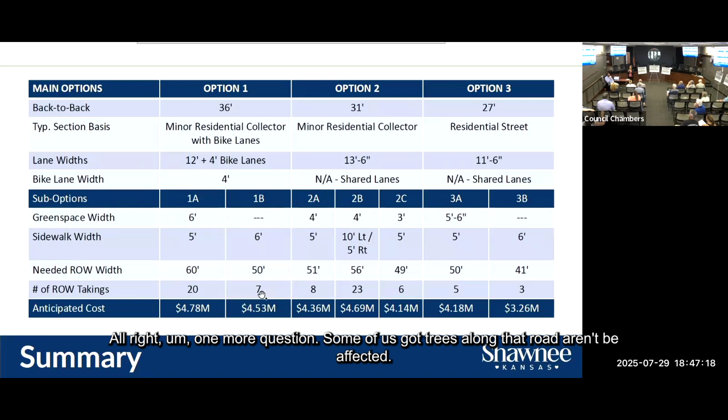All right, one more question. Some of us have trees along there that are going to be affected. What is the planning for trees? Is there compensation for those trees? Will they be replaced? Do we have any feedback? I've got a couple of big oak trees that I don't want to see go.

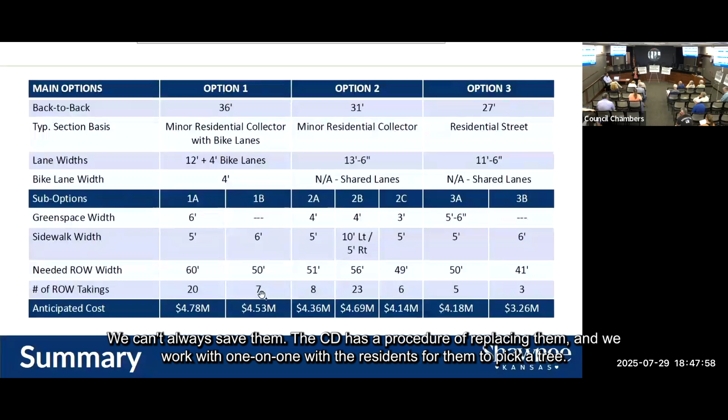Absolutely, so the question is about tree removals. We do our best to try to save as many trees as we can. We can't always save them. The city has a procedure of replacing them, and we work one-on-one with the residents for them to pick a tree. However, typically they're small trees, 2-inch caliper trees, and you get to pick the location. The city maintains them for a period of 2 years, and then we turn it over to the residents for maintenance.

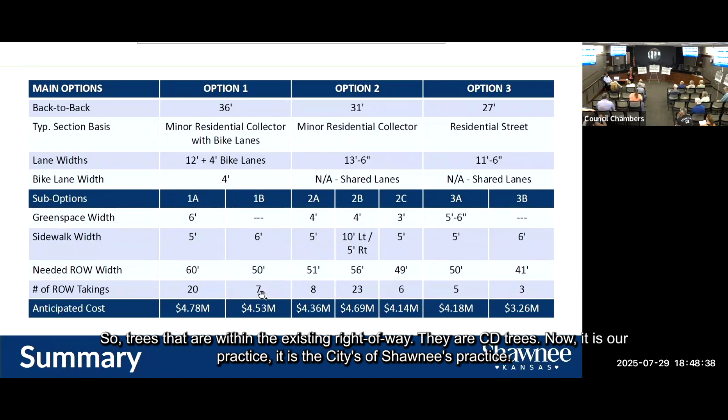One suggestion is to talk about the difference between a tree in a right-of-way and a tree on private property. Trees within the existing right-of-way are city trees. It is the city of Shawnee's practice to let residents pick another tree in exchange for that, but technically those are city trees. For private trees and any damage on properties, we will negotiate with property owners one-on-one, so we will get to know each other a lot.

My question is easy, along those lines. Would you be willing to meet with us on site for one of the public meetings? Black Swan could probably help make that happen if we do it as a group, to be able to point at what we're talking about instead of just talking about it. Absolutely, so the question is would we be willing to do an on-site public meeting. The answer is I will be more than happy to. I have hosted on-site public meetings before. Let's just not do it when it's 100 degrees outside.

I know there are people with more questions, but at this time we're going to cut them off and have them ask one-on-one. Okay, no, don't do this to me.

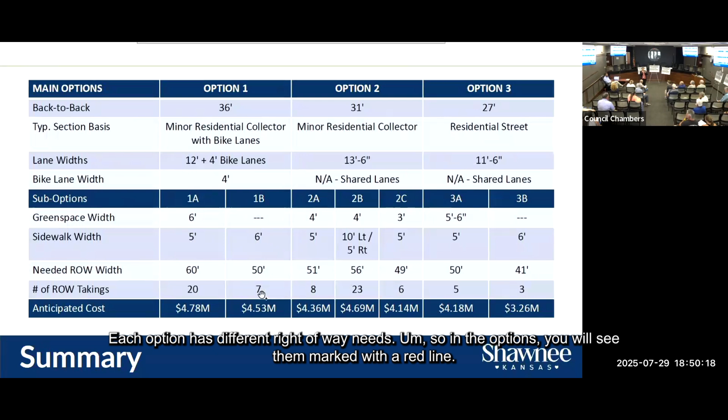Okay, let's take it. So right-of-way, as the easements stand now, with it taking on more of our property, where are those lines going to be set? The question is, where would the right-of-way be? Each option has different right-of-way needs. In the options, you will see them marked with a red line. You would also see that the existing right-of-way is marked. Let me see if I can zoom in here.

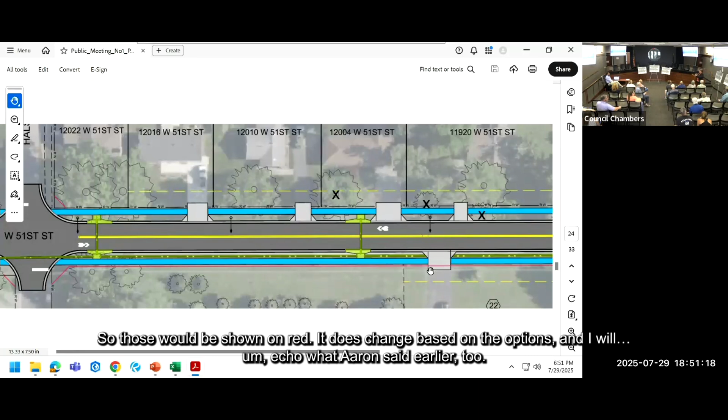The existing right-of-way is shown with these symbols. If we go to another page, for example, let's zoom here. This option doesn't require additional right-of-way on the north side, but it requires additional right-of-way along the south side, so those would be shown in red. It does change based on the options, and I'll echo what Aaron said earlier too, this may change. Right now this is our best estimate with the information we have. We feel a certain degree of confidence that those are about the lines, but they may change. Each of these options has different needs for right-of-way. On the bottom of these boards, you will see, for example, this one says the pros of this option, which is option 3A, only requires approximately 5 right-of-way takings. So we have outlined that number.

Was it 30 or 35 there now on 51st? Get it down to 25? What would it take for the city to reduce the speed to 25, possibly, if we do this project?